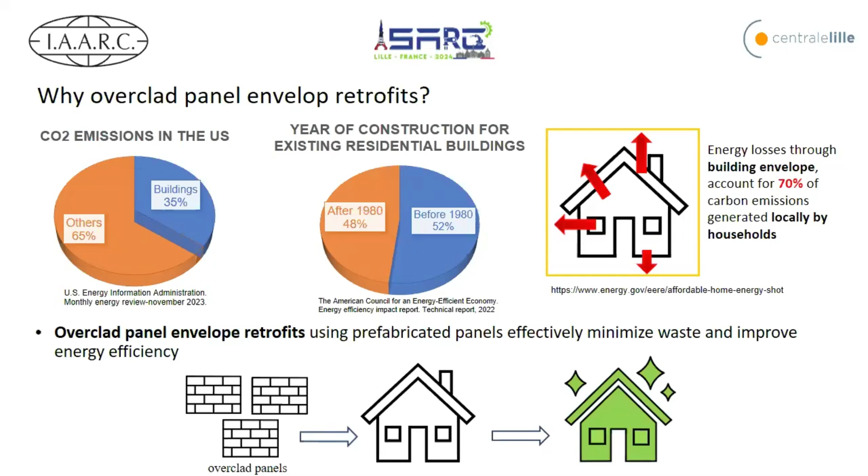Of course, there are plenty of manual installation processes using scaffolding or cranes, but these processes take time, they are not precise, and they could endanger the workers depending on the weight of the panels. Robotic installation has been done in the HEPHAESTUS project, so it's good that Tecnalia is around here. So they have developed it, and we know that these types of systems are feasible. So inspired by this, we want to push the boundary of how much this can be deployed.

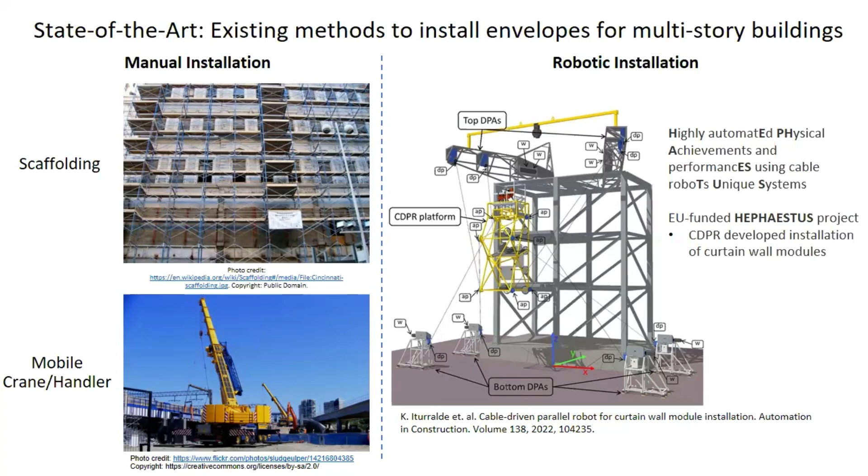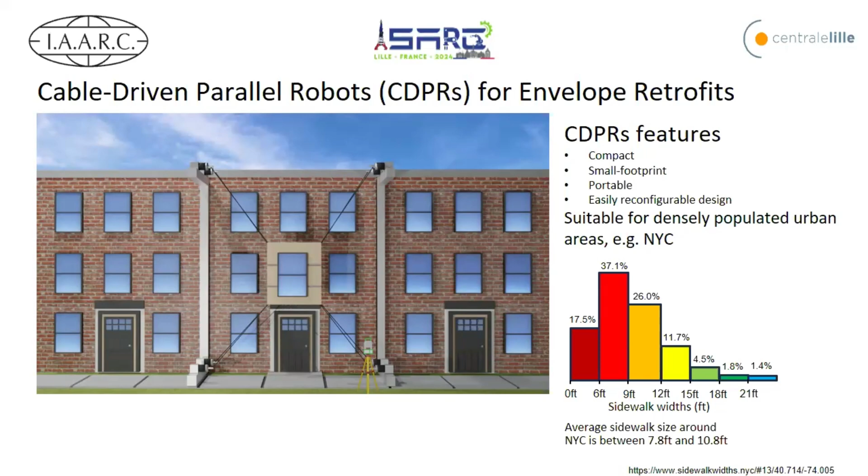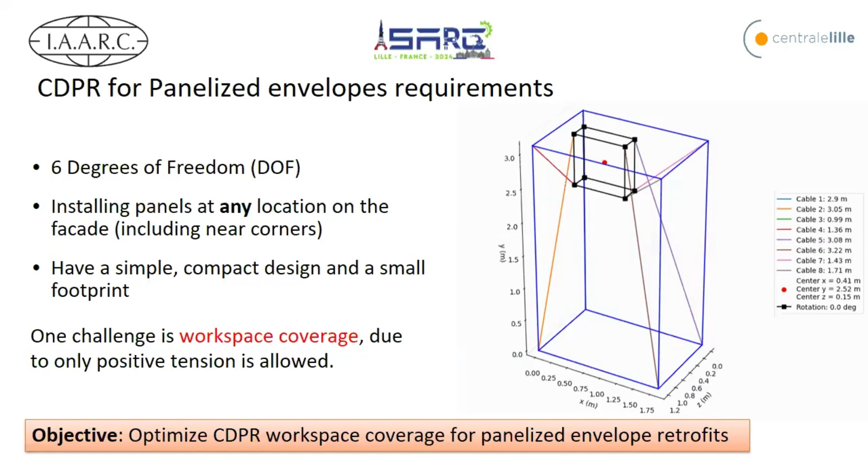And cable-driven parallel robots offer a solution for this. First of all, they can handle the panel in a 6 degrees of freedom space. I'm going to say how you can install this in any location, and what type of issues arise from this. And also they are attractive because they are simple and compact. But the first problem that we're looking at in this research is how to optimize this robot, or the design of the robot, in order to cover as much space as you can. That is the research question here.

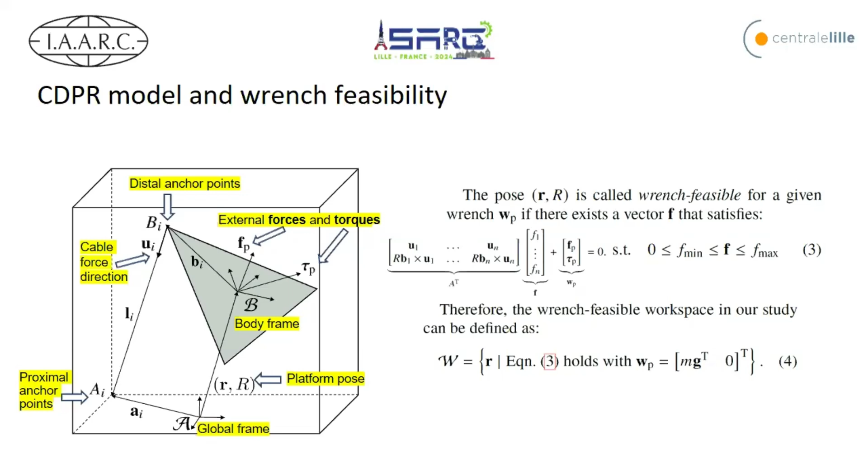So just a little bit on the basics of cable-driven parallel robots. If you look at the static problem, basically you just have a balance of forces and torques. So the first equation is balance of forces. The second is balance of torques. So you want that to be zero, to be static. And you have a constraint equation on force because you have to have a minimum tensile force in order to have a straight cable, and you do not want to exceed the maximum tensile breaking force of the cable. So if you solve that constrained problem, then you obtain the feasible workspace. So all the possible positions where you achieve static equilibrium and you are within the force constraints.

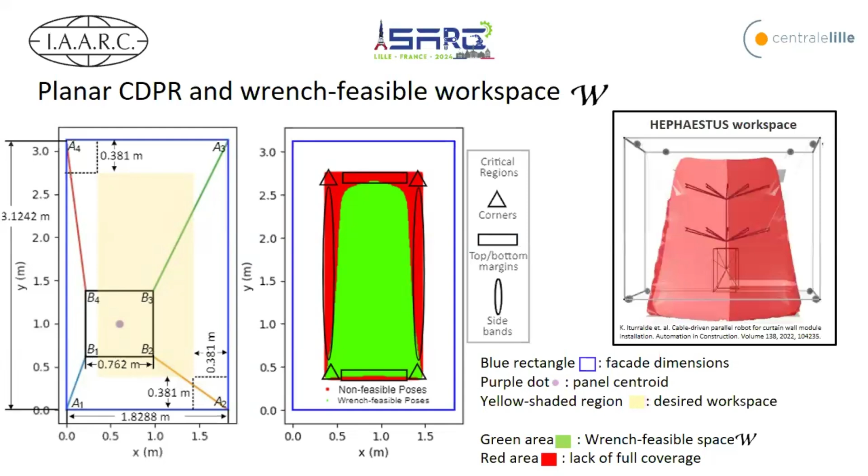I stole that image from the Hephaestus paper that was published in IAARC, so you can see that this is typical, right? So you cannot reach every single corner. So what options are there?

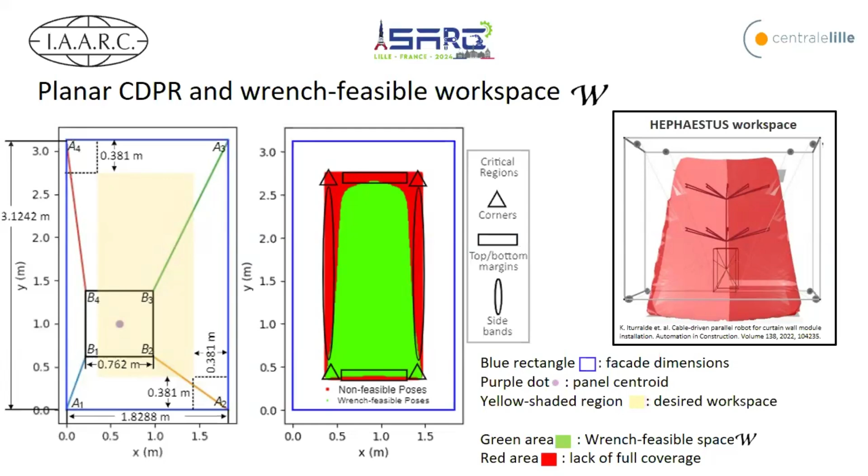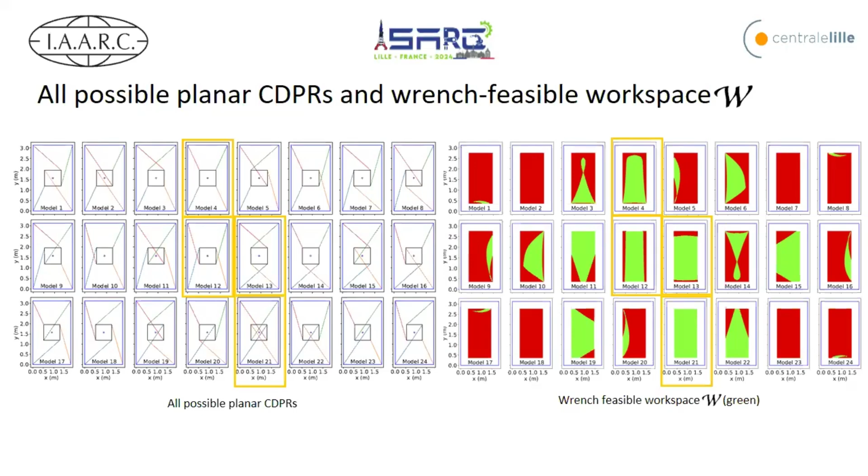So a 2D cable-driven parallel robot is hard to optimize in this space. So we went to the 3D case. In the 3D, we have 8 factorial, so it has so many more combinations of cables.

But surprisingly, most of them were infeasible. This is a histogram of all of the ones that achieve over 50% coverage. There is one that is excellent at covering almost most of the facade.

However, if you see in the diagram, all the red lines are all the cables that are basically in front of the carrier. And that is not allowable because you want to install a panel, so you don't want to have cables in front of the panel, otherwise you cannot install it.

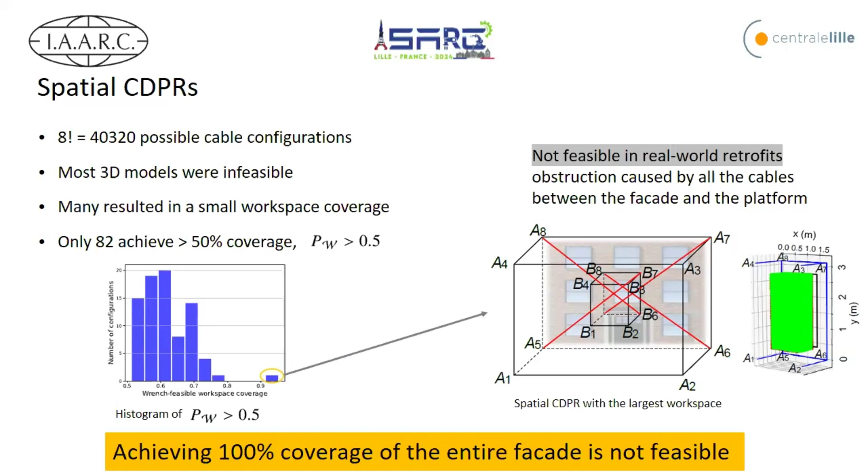So we analyzed the ones with all those cable collisions and cable constraints, and really 4 of them were attractive, which are the 4 models on the slide.

So then we computed the workspace feasibility. Model number 1 is, again, a very intuitive model where you connect the edges or the corners one-to-one. And the other ones have different interesting connections.

But then you can see that some of them work very well on one dimension, but not on the other. For example, model 2 and 3 are very good at covering the height dimension, but they cannot cover the sides. Model 4 is very good at covering the sides, but it cannot cover the top and the bottom.

So one alternative now that we have explored the possible cable combinations was, okay, if you could extend the frame, if you have to make the frame bigger, then what is the preferable dimension and by how much you have to extend it in order to cover what you need to cover?

So these plots here show how much of an extension you can gain, or how much of a coverage you can gain by extending the frame. In particular, for model 4, if you do a 9% extension of the frame, then you can cover almost all of the top part of the building, except the bottom part.

Another option that right now we're considering is if you really want to automate the entire process, maybe you need combinations of model 3 and 4, for example, in order to cover the whole thing. So there will be a point in which you have to reattach the connections, the cable connections, in order to achieve it.

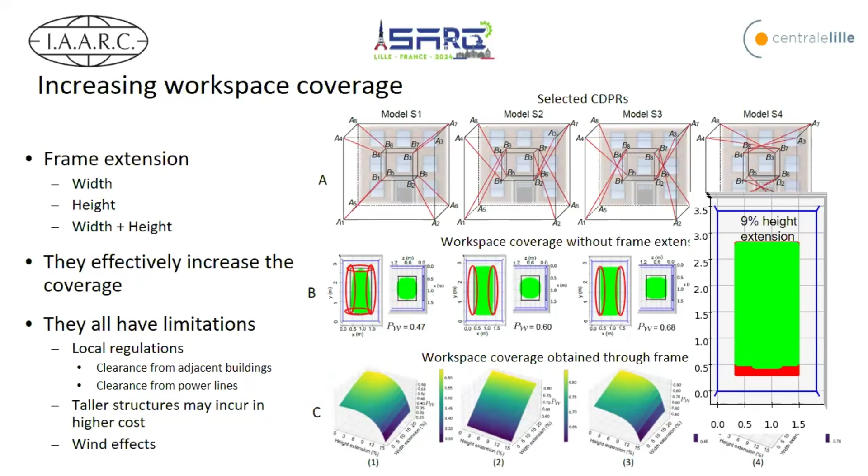So in conclusion, right now we are trying to develop our own expertise in these cable-driven parallel robots for panelized envelope retrofits. We are very interested in maximizing the capability of these robots, so we are constraining ourselves to these highly dense urban scenarios. We're building a 1/3 scale prototype at Oak Ridge National Lab in order to have a demonstration of this.

And as I said, this first study is looking at what you can do to the robot in order to cover as much area as you can.

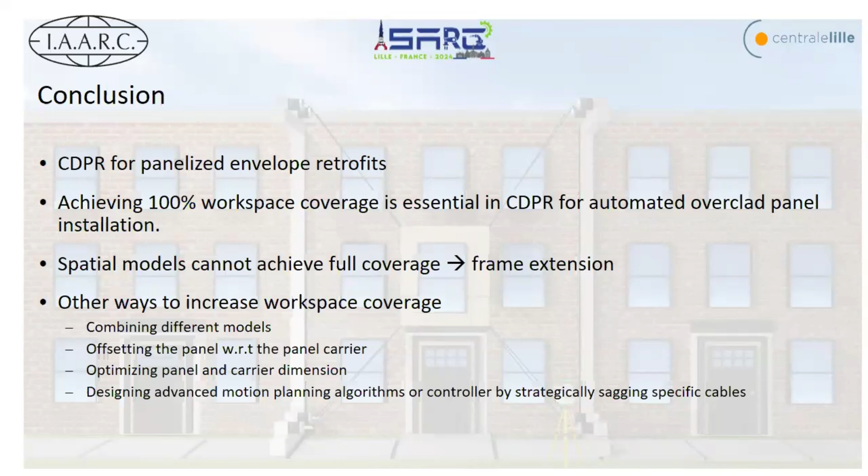And the 2 things that came up were how you attach your cables have a good impact on it, and then you could extend your frame. Given the robot model that you have, you could either have a width extension or a height extension, and then increase your workspace coverage.